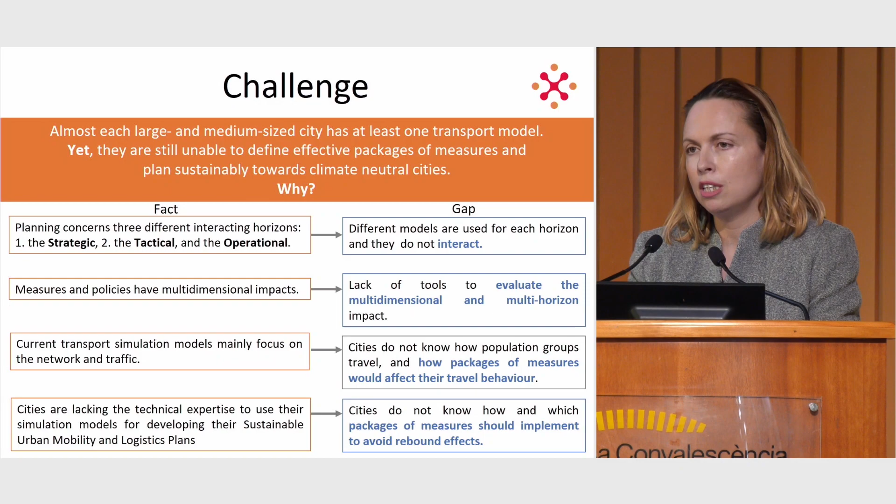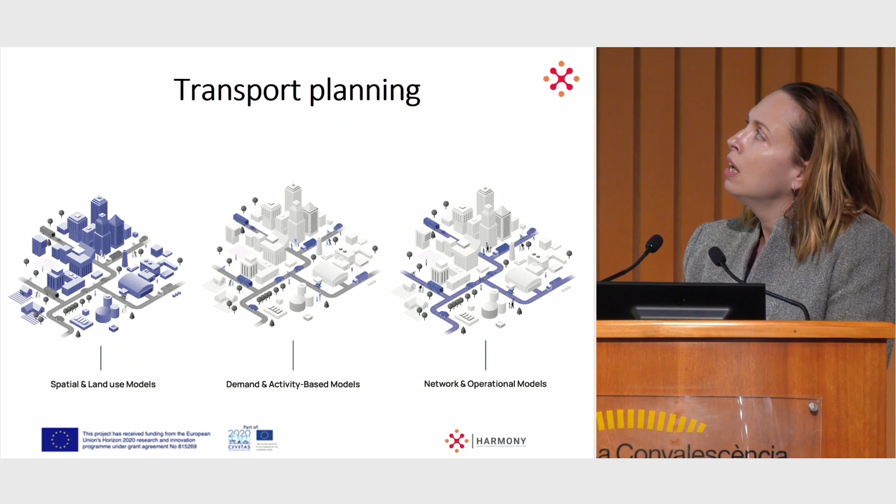The problem, as you can see from this picture, is that currently in most cities these models, even if they exist, are not interactive, they are not interrelated, while it's obvious that there are clear interrelations in the way each of them may affect the decisions of the other layer. So this is something that we try to tackle. This is actually what Harmony MS conveys. It's developed an integrated platform where all these different models are connected, integrated together.

The strategic spatial or land use model provides input to the demand or activity-based model, and also vice versa, a behavior or an issue steadily observed on the operational layer will provide input back to the activity-based model on a change in behavior that should be depicted there.

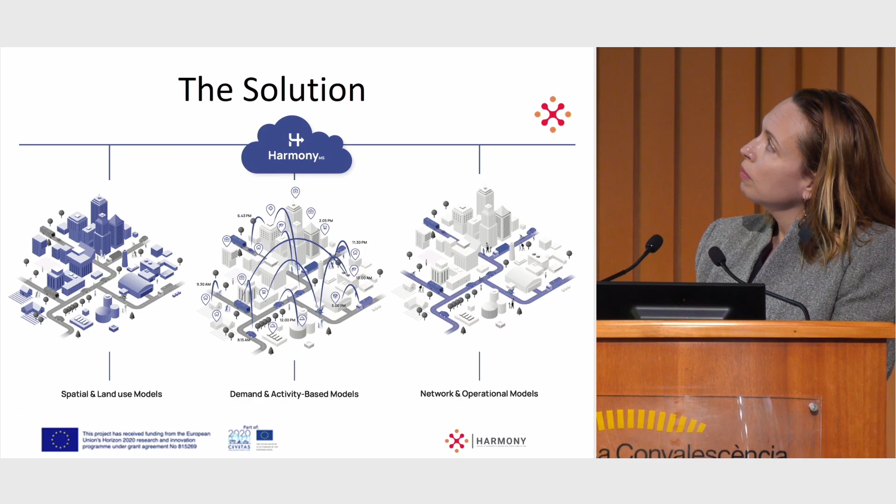And here we try to convey the key takeouts, the key areas where Harmony MS actually innovated. And we consider that it is a tool that can considerably assist planners, cities, modelers to further develop the modeling tools that we have available.

So first and foremost, as I said, it's the interaction between the different models that a city may already have, or new modeling components that are considered necessary in order to tackle the new mobility services that are introduced, like connected and autonomous vehicle sharing schemes, different delivery methods, because another component that is still extensively neglected from the models that cities have is the freight component.

And this is something that you will hear a bit more about later. This is something that we are really proud that we have integrated in Harmony MS: the freight component at the tactical layer and how it affects decision-making and the interaction with passengers.

Also, acknowledging that cities already have a number of models that they have invested money in, we didn't want to leave them aside. So a key component of Harmony MS is that it provides the ability to integrate, connect these models, to plug them into Harmony MS.

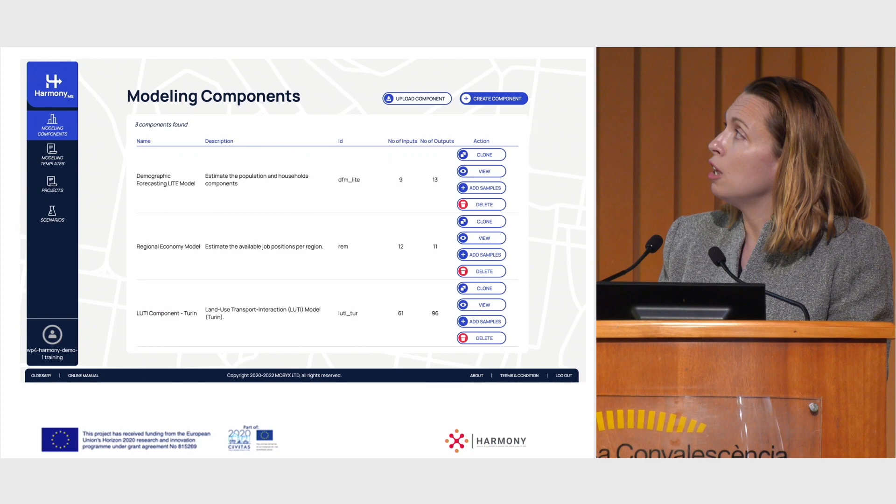And some more details: this is the modeling component, where you can introduce different models and then run them. This is how the tactical passenger simulator looks, where, as you cannot see clearly, there are pre-specified fields where you need to enter information or upload data, and it will guide you on developing the model.

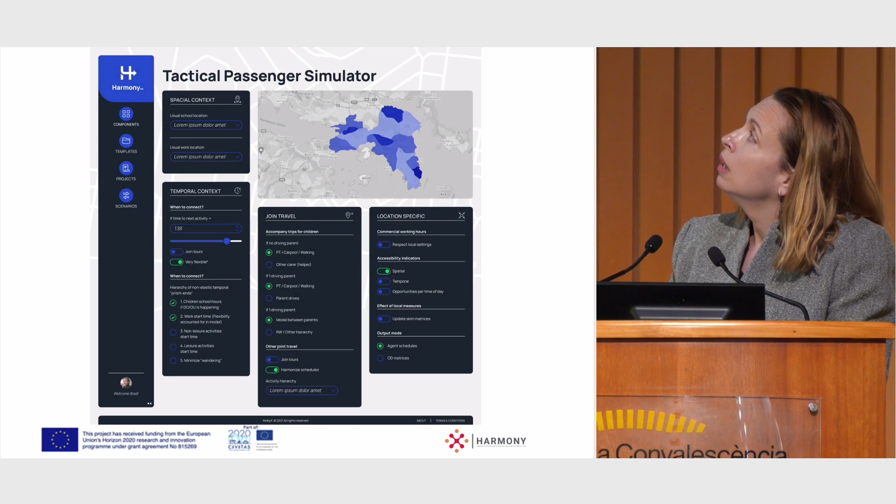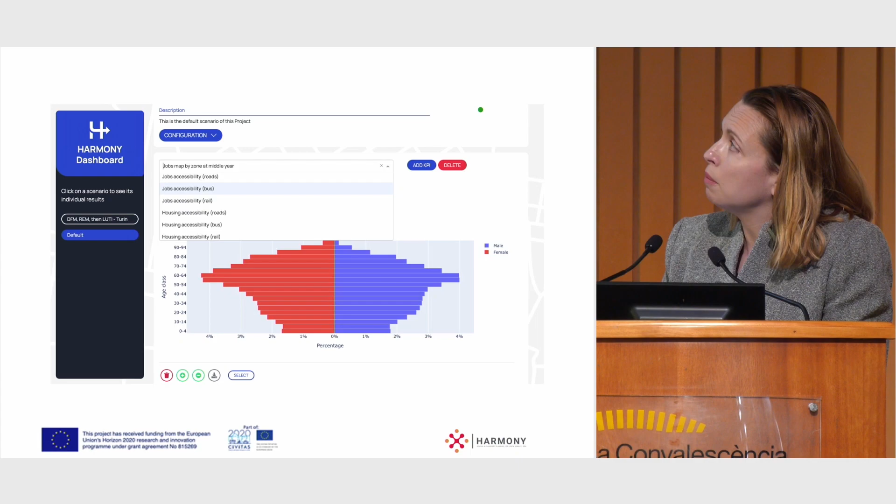And this is just an illustration from part of the visualization with findings, just on the distribution from part of the demographic forecasting model.

And I will conclude with the value added that we see Harmony MS has for potential cities, authorities, and transport planners or transport modelers. First, the easiness of actually combining models that either you already have or you need to develop for the specific city. It is easily configurable, and it's not a black box, which was something that came especially from the transport modelers, that often in the commercial packages they do not have the chance to modify modeling parameters or specifications, or to add components that they consider are missing. So this is something that we tackled.

It has a really easy scenario building, especially for someone that is not a transport modeler, a transport engineer or an economist working for an authority, to allow them to develop their own scenario in a simple way.

Linkage, as we said, with existing commercial models, the visualizations with the comparisons, the KPIs and graphics, and the fact that we can have a better utilization of existing resources.

So apart from Harmony MS, which is pretty much what I described, we have also a lighter version. The lighter version is less data hungry, because again, this is something that came from the cities: how we can develop and apply part of these models without necessarily having to do an extensive data collection, and just utilize the resources and data that we currently have available.

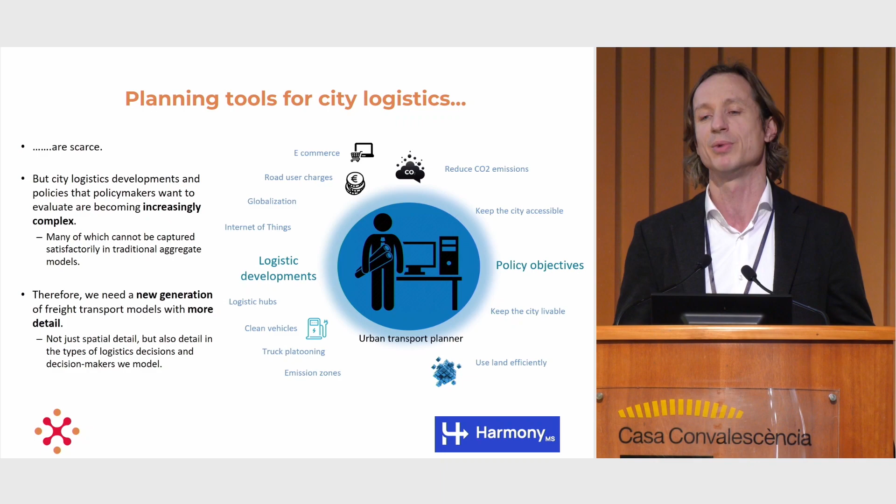On the other hand, the policy objectives are much more ambitious, so we need to reach climate goals. The project officer, Thiago, already mentioned in his introduction the SULPs, the Sustainable Urban Logistic Plans. So we also need policy support tools for logistical planning, but they are scarce. And in Harmony, we made a big improvement in that field.

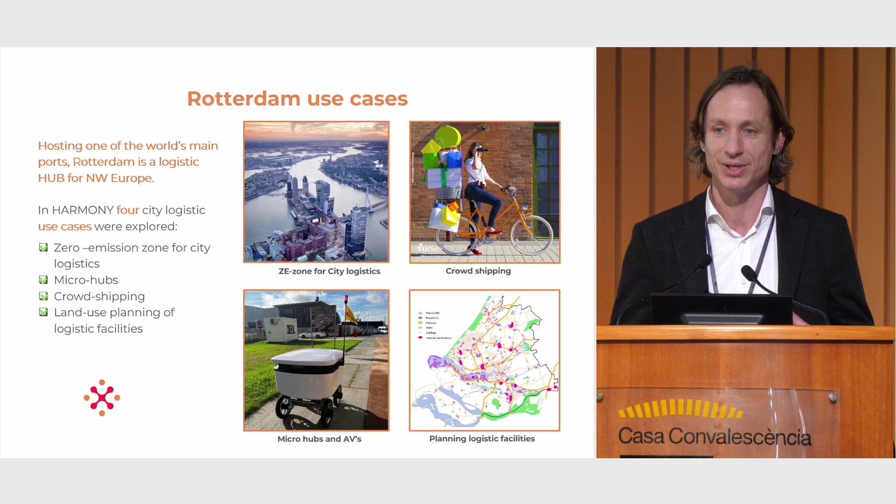And we also looked into the impacts of different spatial planning of logistic facilities on emissions and the use of the networks. So this is a big variety of city logistic use cases with very different impacts, and we could analyze them all with the tactical freight simulator.

In this short pitch I cannot tell you all the modeling details, but to give you a short flavor, in the tactical freight simulator we have implemented an agent-based approach. We are working towards a new generation of models that are becoming more microscopic, because if you want to represent demand well, you need to simulate decisions at the level of individual agents, since they are very heterogeneous. In city logistics in particular, the decision-making is very diverse: you have small shops, even households ordering parcels, but also logistic service providers. So agent-based modeling is the way to go.

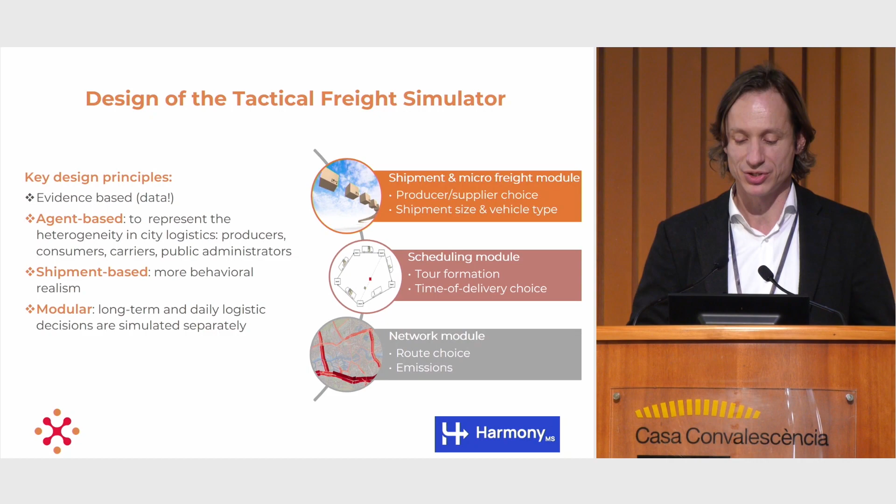It's also shipment-based, so we are not modeling aggregate freight flows, but decision-making at the level of individual shipments, which is the actual level at which decisions take place. So you can develop much better choice models for it. And as Athena already mentioned, the Harmony MS architecture has a modular structure, so we have a hierarchy of choices that are modeled, from more long-term decisions to daily decisions like daily scheduling, and finally also network modeling.

Well, then some results. These are illustrations of the 4 different use cases we have developed in the model. One was on the zero emission zones. A key finding that we found there is that indeed with a zero emission zone you can reduce drastically the emissions in the city center of Rotterdam.

But as a secondary impact, there will also be a lot of rerouting traffic. So freight traffic that normally passes through the zone has to go around the zone. And this also leads to secondary impacts that are not trivial and not expected in advance. So if a zero emission zone is to be introduced, it's important to also try to mitigate the secondary impacts on the road network around those zero emission zones.

We also had an implementation of micro hubs where the delivery of parcels was split up. So the last yard was done either by cargo bikes or by light electric vehicles or by those autonomous vehicles. And we studied different scenarios here. So how are the micro hubs operated? Does each parcel carrier operate its own micro hub? Or do we have a shared system where the service providers collaborate?

And we noticed that in particular this last business model that you implement for micro hubs is very important. So if the logistic service providers collaborate and they use the same micro hubs, you can get much more efficient consolidation of the last yard parcel deliveries, which leads to the minimum number of vehicle kilometers in your city center.

We also studied crowd shipping. A result we found here, well, it's mainly dependent also on the assumptions that we made. But we noticed that the additional traffic that was generated by the occasional carriers, so a commuter that goes home, picks up a parcel, brings it to a neighbor, and then goes home, those additional kilometers outweigh the reduction of the actual parcel delivery by the conventional carriers, because they are already so efficient,

and because of the high density of the deliveries that they do. It's important to be aware that we might also get more mobility or more vehicle movements if we introduce concepts like this. So you need to carefully define how we organize crowd shipping in order to avoid too much extra mileage.

And then finally, in the use case of land use planning, we also noticed significant effects, mainly at the local level. You can imagine that if you plan your logistic facilities in highly dense urban areas or more rural areas, this will have huge impacts on your network.

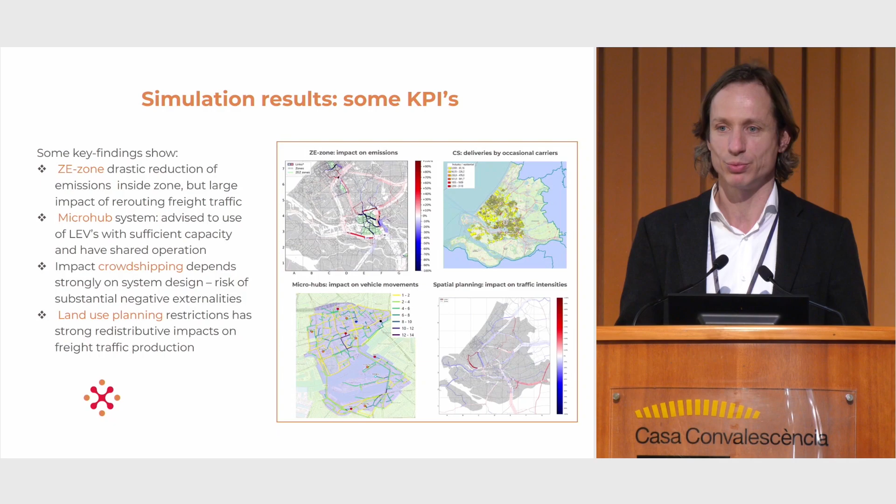So this was a snapshot of all the use cases we did in Rotterdam, mainly focusing on city logistics, and by this we have tried to advance the availability of planning tools for city logistics, and in particular for the evaluation of sustainable urban logistic plans. So thank you very much.

Thank you, Michiel. Our second application is in the metropolitan area of Turin, and Francesca Fermi is going to present it. Okay, thank you, Maria. Let's see. Okay.

Turin was one of the urban areas where the HarmonyMS has been applied. And the focus has been mainly on the urban functional area of Turin, which includes not only the municipality of Turin, but 87 municipalities around it. The purpose of the modeling application was the focus on passenger mobility, integrating different modeling components at strategic, tactical, and operational level, as Athena explained before.

And based on this comprehensive and integrated structure, selected use cases have been defined, focusing on different objectives and policies related to public transport investment, mobility as a service, remote working, and road vehicle access regulation.

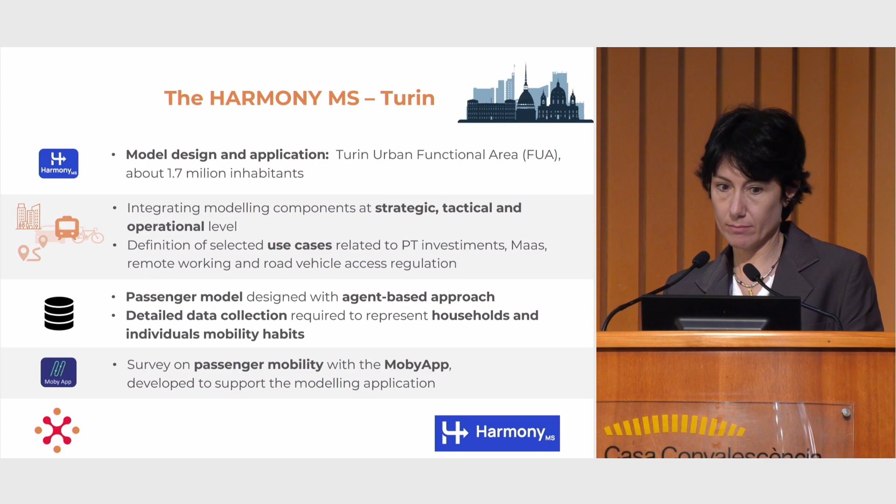Okay. Just to give you an overview of all the model that has been developed for the urban functional area in Turin, several modeling components have been developed at strategic level to describe socioeconomic and land use aspects of the area. Then the core related to the tactical level with the activity-based model, and the operational level with a network assignment model developed with the Visum software. Oh, sorry. How to go back?

Okay. This complex structure integrated together in the HarmonyMS allowed to evaluate different aspects of the use cases tested with the HarmonyMS, ranging from, of course, passenger mobility, to environmental indicators resulting from the assignment of each mode to the network. The modular structure of the HarmonyMS allowed to test use cases with different time frames, and therefore focusing more on long-term impacts or on daily decisions of passengers.

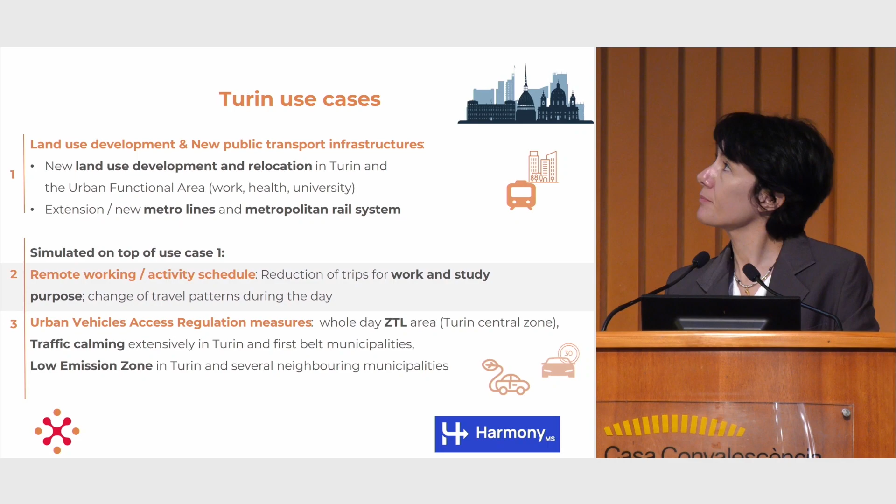Of course, the goal of these use cases was to test the impact in terms of congestion reduction with respect to dependencies on car and the impact on the environment. To give you an idea of what we were able to derive from the application with the Harmony MS, we had results at several levels, having models at strategic, tactical, and operational level. Different key performance indicators could be analyzed.

So first of all, accessibility of jobs and housing, especially for the first use case where relocation of functions in the area was planned. Of course, impact on modal split, looking at the changes with respect to the base year with the potential reduction of dependencies on car in the Turin municipality and in the rest of the urban functional area.

We had a look at the impact in terms of CO2 emissions resulting from the assignment of each mode to the network, and taking into account also, thanks to the modeling components related to vehicle stock evolution over time, we could evaluate the impact in terms of GHG emissions over time, and of course, impacts in terms of passenger demand with a reduction of car trips, especially in the last use cases where strong measures to reduce road access were implemented in Turin, especially with a strong reduction of 27%, and also in the rest of the urban functional area.

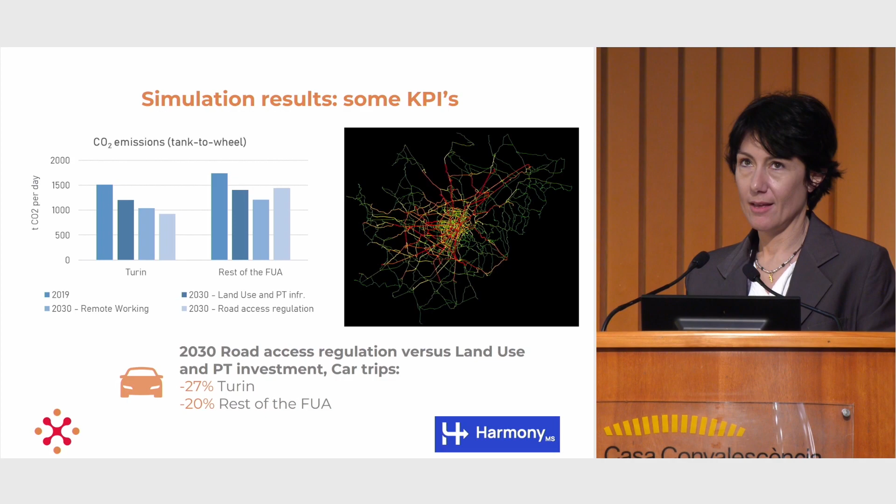This was just to give you an overview of what we were able to derive from the application in Turin of the Harmony MS. And I'll give the floor to Panos for some information on Oxfordshire. Thank you.

Thank you, Francesca. And the last one is the application of the operational simulator of the Harmony MS and the adapters that we have developed. And Panos Georgakis from the University of Wolverhampton will present this case. Okay, hello everyone. So my presentation is about the operational layer of the Harmony MS. So just to give you a quick overview of the different solutions and tools we developed and some examples of the use cases where the tools and the models were actually applied.

So in terms of the Harmony architecture, the operational layer actually was sitting at the bottom. So we're trying to find what kind of tools or what kind of models we can develop that do not exist. And effectively, we try to focus on new mobility concepts. So we try to develop tools that can simulate passenger mobility concepts like shared mobility, mobility as a service, and also on the logistics side to simulate concepts like cargo bikes for last mile logistics, for example, and at the same time see how we can integrate new vehicle technologies like autonomous vehicles, try scenarios for electrification and so on.

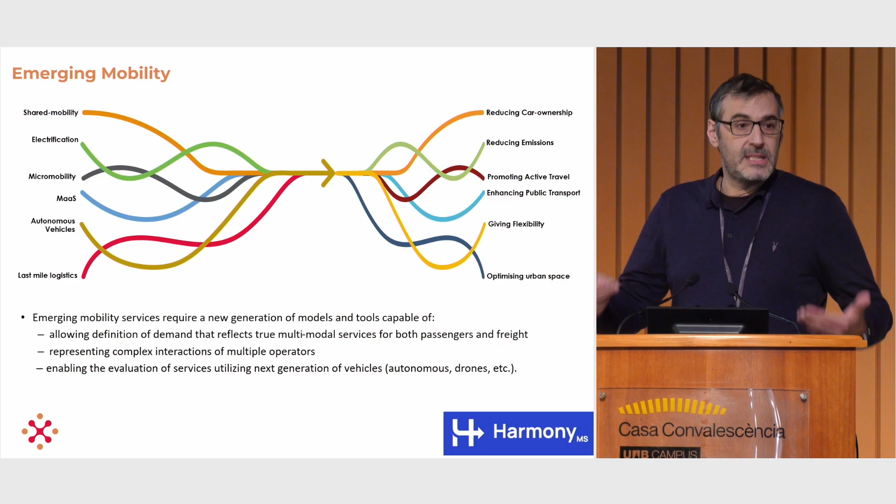And also create or extend the functionality of some of the existing supply simulators to accommodate things like drones and autonomous vehicles. So this is a very quick snapshot of what we tried to achieve at the operational level.

In terms of the individual models, again, the main functionality was to offer within-day operational simulators. As I mentioned before, mesoscopic or microscopic, introduce new services or the capability to simulate new services for both passenger and freight. So the controllers we developed for the passenger case allowed the simulation of mobility as a service concepts,

or demand responsive transit. For the freight controller, it was scheduling models for last mile logistics and models that allow the dynamic rescheduling of fleet, for example, again, taking into account what happens at the very macroscopic level. We also developed models for energy and emissions, and also to output results related to noise.

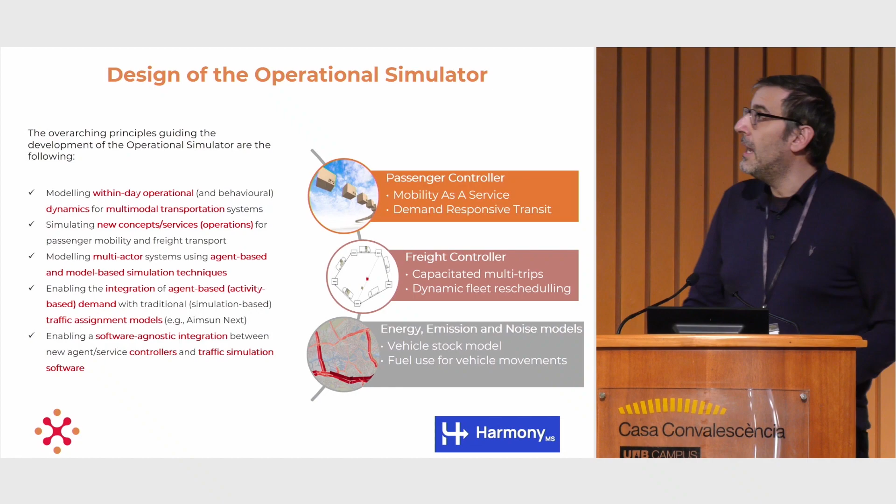In terms of the implementation considerations, again, we have to take into account this agent-based approach and look at some new ways of how demand is defined and how we can actually accommodate this in the operational level, and also have some sort of a software agnostic integration. So the idea was that the supply simulator could actually be swapped between different solutions. So that was also a consideration that we had to take into account as part of the development.

In terms of the use cases that we implemented at the operational level, the use cases and the way we had to deal with them actually trickled down from the higher layers, because we facilitated the tools that we developed to simulate the demand that was coming to us from the tactical layer. So the use cases were very aligned with the use cases at the strategic and tactical layer. So in terms of Oxfordshire, we tested demand responsive transportation.

You can see here at the top the different microsimulation models that we actually used. For the Rotterdam case, we evaluated the use of cargo bikes for last mile logistics. In Turin, we looked at the low emission zones and how the expansion of low emission zones can have an impact on environmental indicators. And in the case of Athens, we tested the impact of public transport electrification combined with some micro-mobility interventions. And we also tested the impact of autonomous vehicles and how the different penetration levels of autonomous vehicles may impact the supply side.

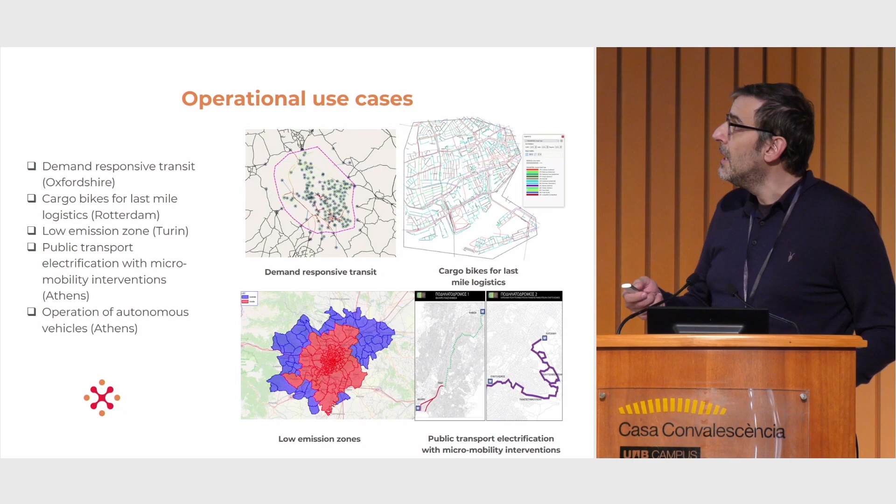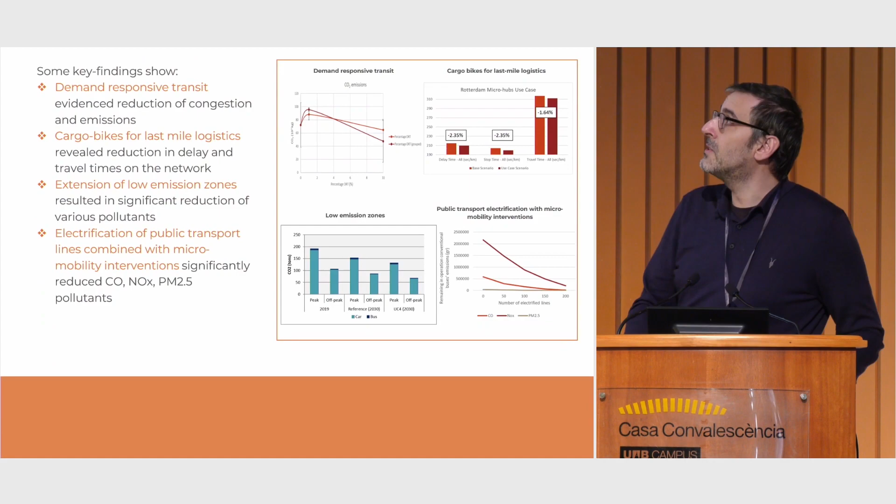And of course, through the tools, we were able to generate different KPIs, and some of them are quite self-explanatory. For the demand-responsive transit, that resulted in fewer vehicles on the network, which of course improved congestion and effectively had an impact in terms of emissions. The same thing with last-mile logistics. Some of the demand was accommodated by cargo bikes instead of motorized vehicles, so that had an impact on the performance of the network and also on the emissions.

We tested extensively the emission models in the case of Turin, like Francesca also mentioned, and of course this extension of the low emission zones demonstrated a significant reduction of different pollutants. And in the case of Athens, the electrification of the public transport lines combined with the micromobility intervention had a significant reduction on different kinds of pollutants.

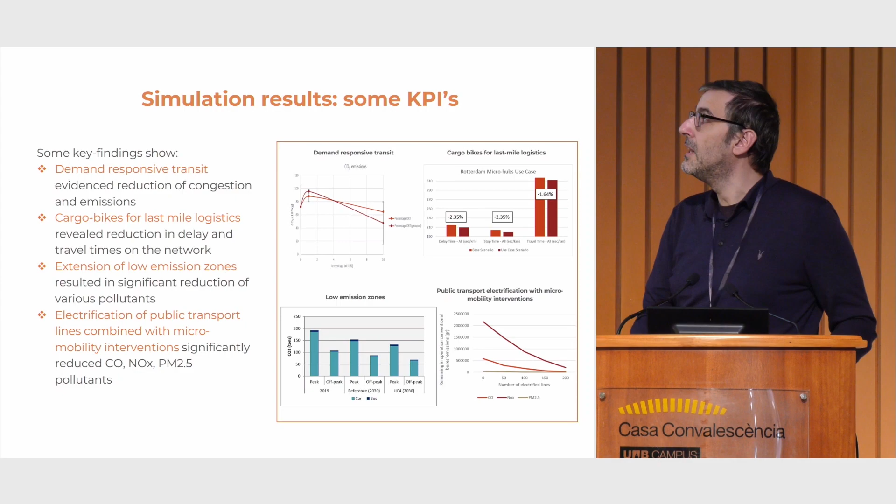What we were able to do at the operational level, we could have a very detailed representation of those KPIs, so we could generate different KPIs at a very low level when it comes to the network, like different sections or different intersections. So we had this capability with the tools developed. And that's the end of my presentation. It's a very quick presentation of what we did at the operational level and the different use cases we implemented.